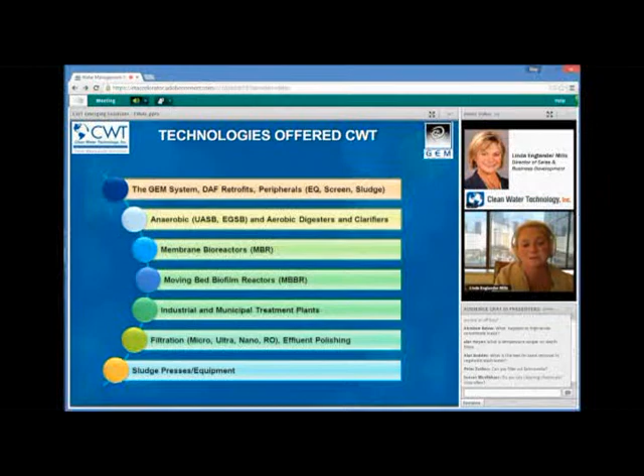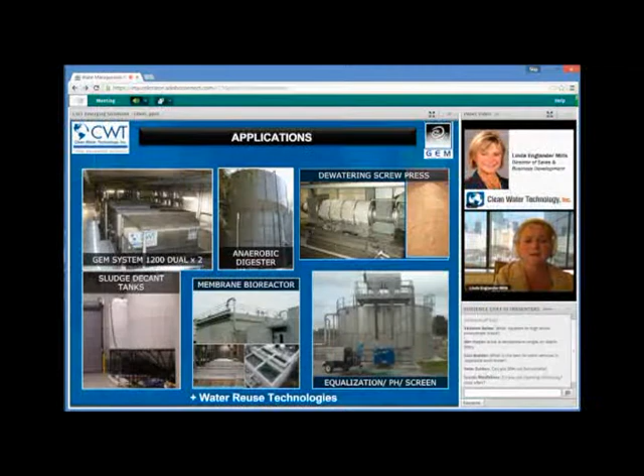Just an example, here's our sludge press, a couple GEM system 1200s that were used in a meat facility. We do meat, poultry, pulp and paper, even car painting and car facilities. So it's a very, very good system.

So at this point, I think I'd like to run to the animation, if you could do that for me.

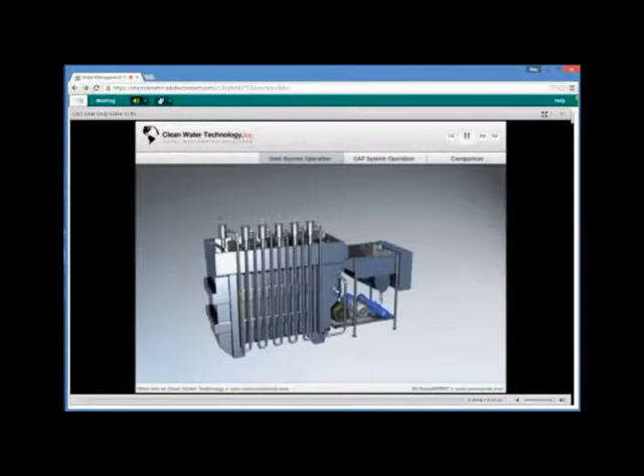Excellent. It should be starting. It hasn't started for me. Oh, there it is. Okay.

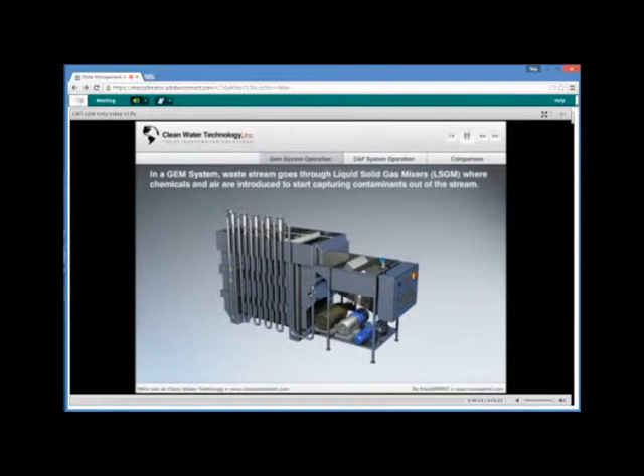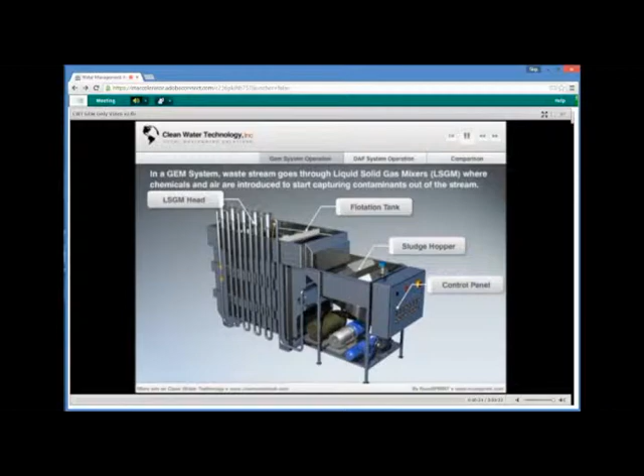So here it is. It's a skid-mounted unit, so everything is available on the skid. You've got the control panel, your flotation tank, your sludge hopper, and your air compressor, water pump, sludge pump. What happens in the system that makes it different than dissolved air flotation is we're injecting air into 100% of the waste stream. So you see this first head.

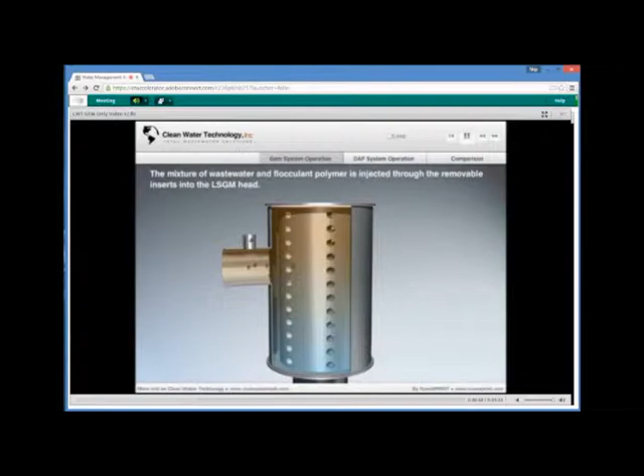We're sending the waste stream through that head, and what we're doing is we're doing it under about 110 psi. We're also adding polymers. Now you can add them in any one of those heads, as you'll see, they run in a series of 6. And so we're going to inject the polymer in any one of the 6 heads.

We use a dual floc approach usually. So that means... well, I'll get to that later. But actually, we're able to expand our system up to twice the size of the minimum usage. So by opening or closing those heads that you saw, the little plugs, we're actually able to increase our flow.

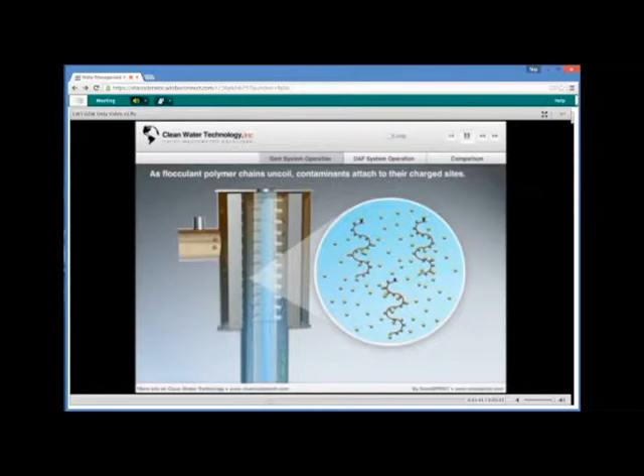So the flocs, as they come into this chamber or the cylinder, the polymers actually are coiled up. Polymers stay coiled up generally, and when they do that, they're only attracting waste particles to the outside. CWT has a patent on uncoiling that polymer. So what we're doing is we're opening up that polymer, availing more than 2 times the charge site, so that we're attracting more waste particles per polymer.

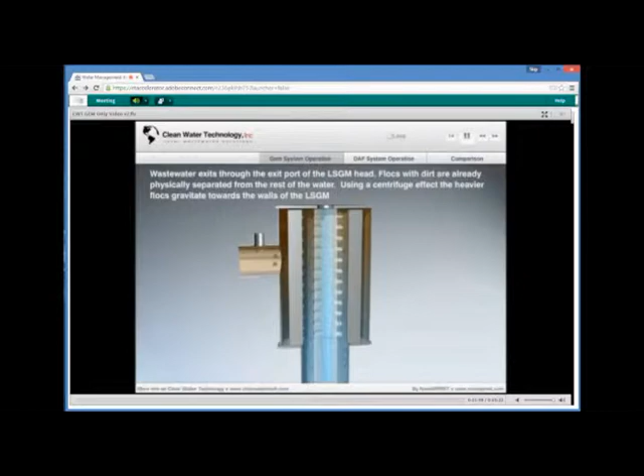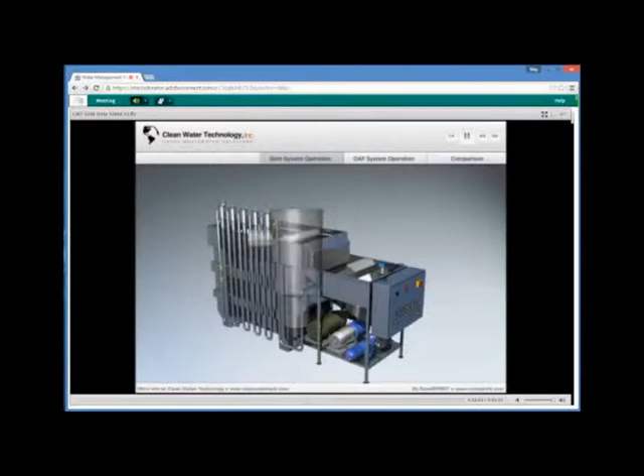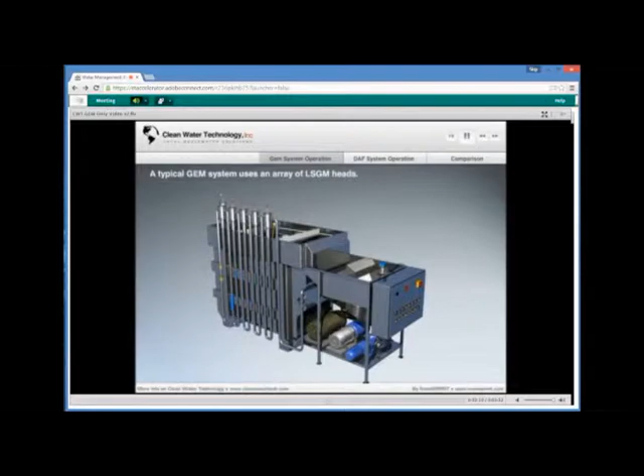And as you can see in these heads, they're in series, and in each head we drop the mixing speed and energy by 10 to 15 psi. So particles that didn't attach earlier on are more able to attach at the slower velocity.

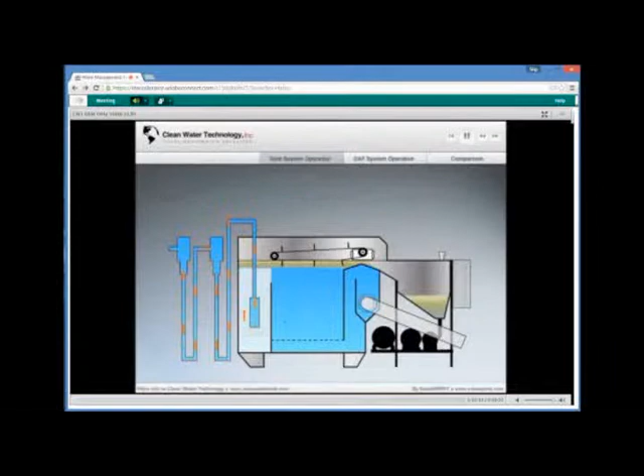Then what we have here on the left of the tank, where it's white, is the bloom chamber. Basically, we're dropping that pressure down to just about nothing. And as we do that, the flocs just pop up almost like popcorn to the top of the tank. As you see, we're lowering the pressure, they're popping up, a lot of the flocs are dewatering.

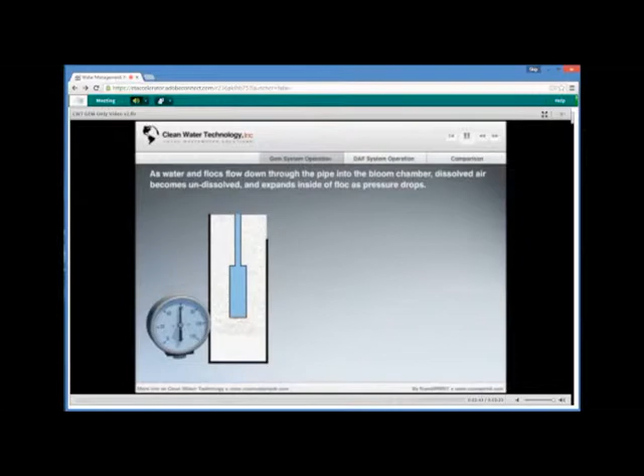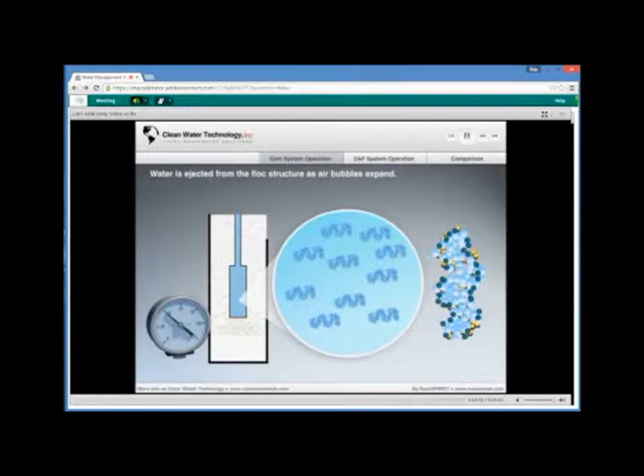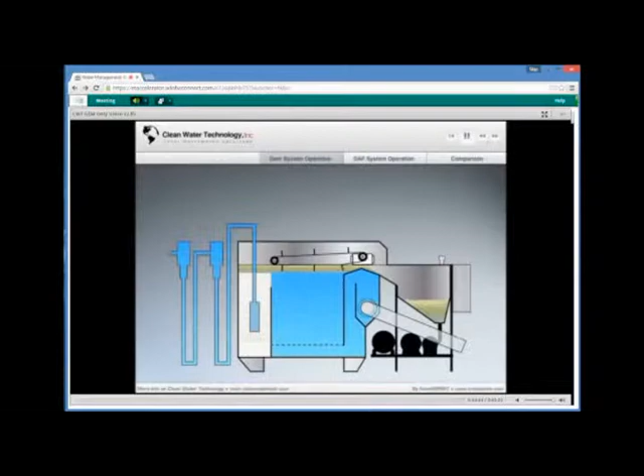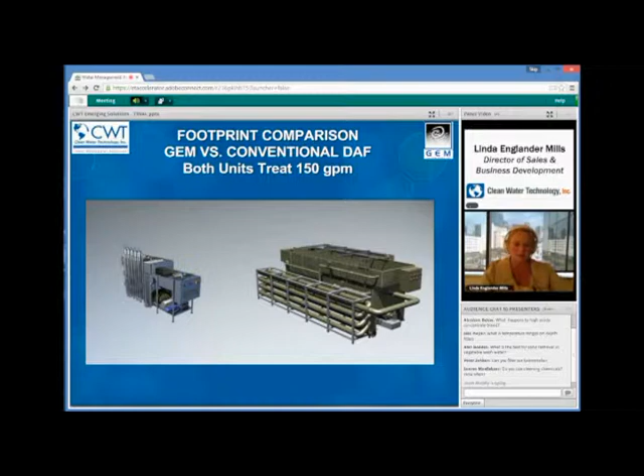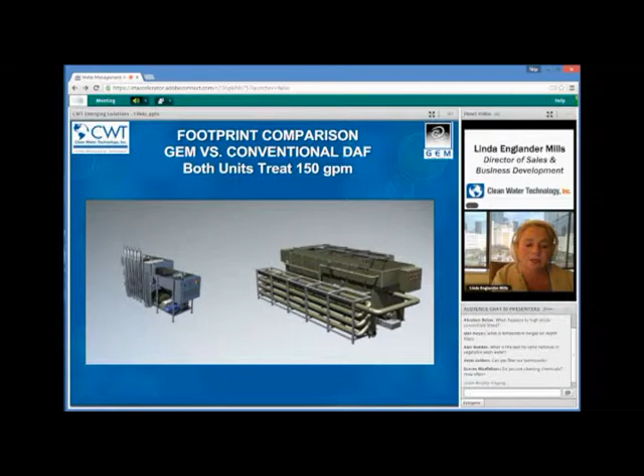So I think we can go back to the slide. So again, it looks crazy that a small system like that could take the place of a larger system, but it's technology that's actually been around in the mining industry for many, many decades. And we just happen to be the first company that brought it here. And we've got several patents that I'm going to talk about a little bit.

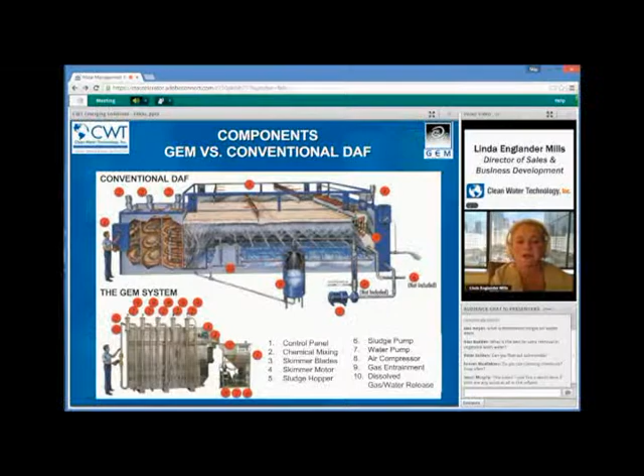But first I'm going to tell you pretty much the difference. As you saw on that skid unit in the animation, everything is on this. It's a plug-and-play system. You've got the control panel, the chem mixing system, skimmer blade and motors, sludge hopper, air compressor, water pump, sludge pump. So everything that you need is in the system.

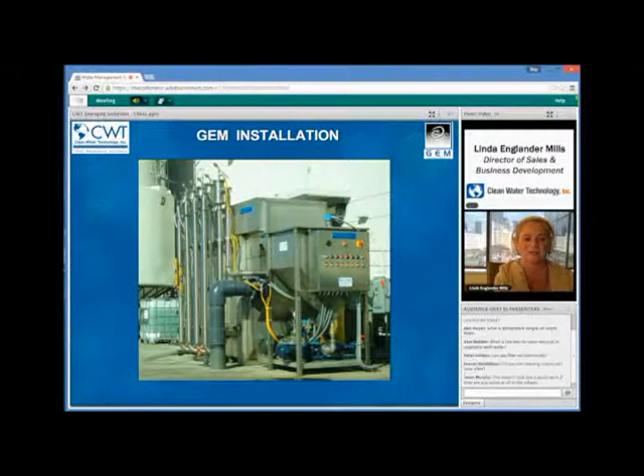Here's, again, an example of plug-and-play. They've got the water pipe going right into our system. We clean the water, it goes right out. It's pretty easy. We've got many, many sizes, anywhere from below 30 GPM, like 5 to 30 GPM, all the way up to 1,800 and beyond. We can do custom size units for you.

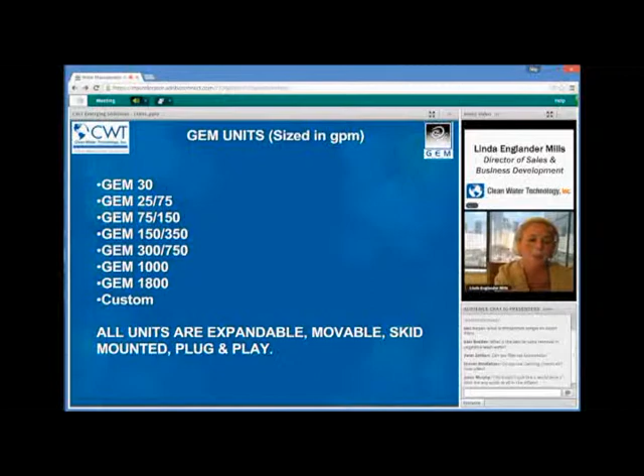Again, they're expandable, they're movable, they're skid mounted, and they're basically plug and play. Plus, we do a lot of the design for you. That's part of the job, and I'll kind of get into that a little bit further. But first, I'm going to talk about our patent.

Again, I mentioned that we're dissolving air into 100% of the waste stream. The reason why that's important is because as we do that, we're creating many, many more bubbles than would a dissolved air flotation unit, which generally recycles the stream and adds air kind of in the tank to help float. We're injecting that air at the very beginning. So we're creating about 10 million bubbles versus maybe about 2 million bubbles.

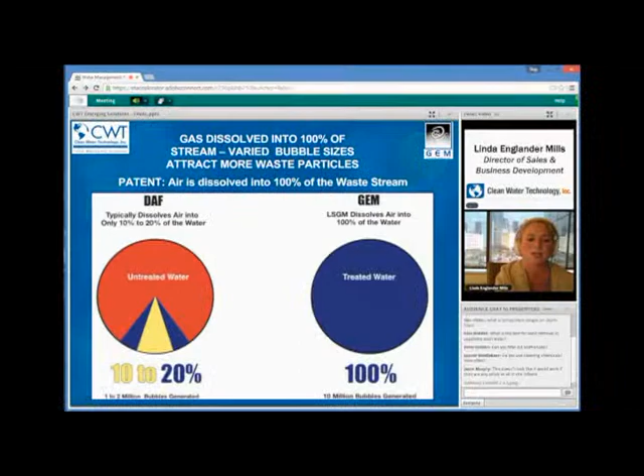So again, waste particles like to attract to bubbles that are the same size or smaller. So by creating very small bubbles and by having more bubbles, we've got a much better chance to attract way more waste particles or more contaminants.

The second patent, again, is on the chemical efficiency and mixing. We've got very stringent control over the chemistry dosing, the mixing time, and the mixing speed. In each of those heads, we can make that happen.

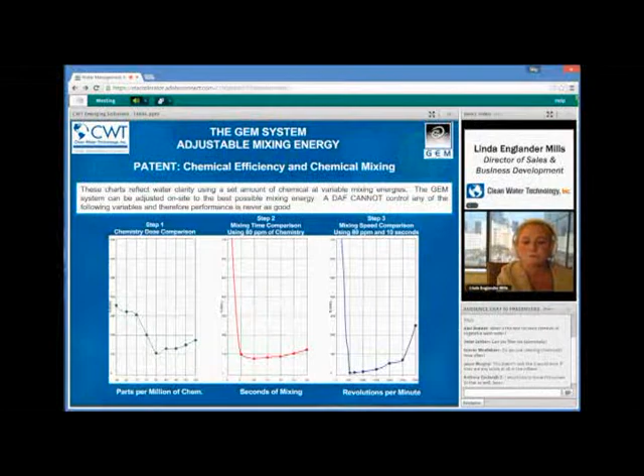The next point is our bubbles expand because we're using a floc dewatering technique. In a dissolved air flotation unit, the polymers and waste particles generally rely on the collision method, bumping into each other and then using the air to float. What we're doing is proactively separating that in our LSGM heads or GEM technology, so by the time our solids hit the tank, they're already separated.

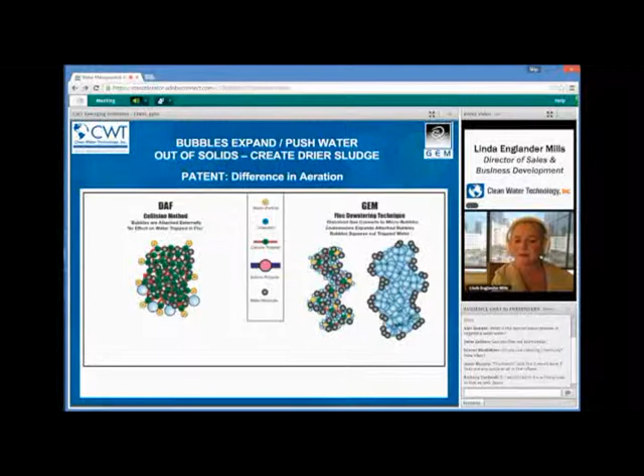Again, some of the operational things, as Cliff had mentioned earlier, operational costs are just as important as capital costs.

Basically, we're creating much drier sludge. The polymers close back up and squeeze out the air or water, but also our sludge, because of all that air we're introducing, continues to decant over a number of days. So if you put it in a cone bottom tank, it's going to decant up to 10 to 13% off the bat, depending on your waste stream. Obviously every stream is different, but it can decant up to 20, I've even seen 30% or more.

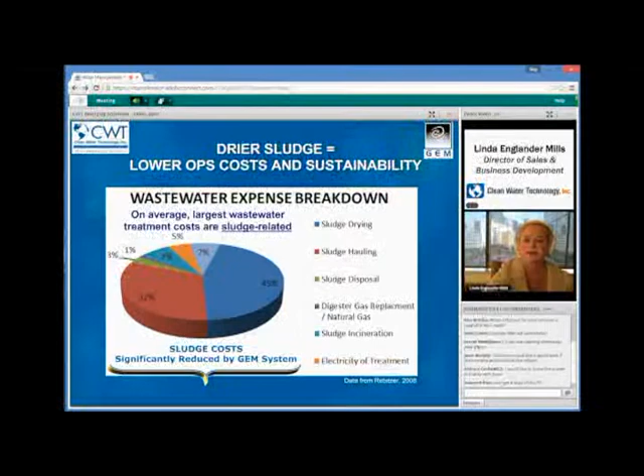So it's pretty phenomenal. And if you look at sludge costs, almost 77% - this was a study done in 2008 - about 77% of people's wastewater costs were related to sludge hauling, sludge disposal, sludge drying. So that's why it's so important that we have such drier sludge.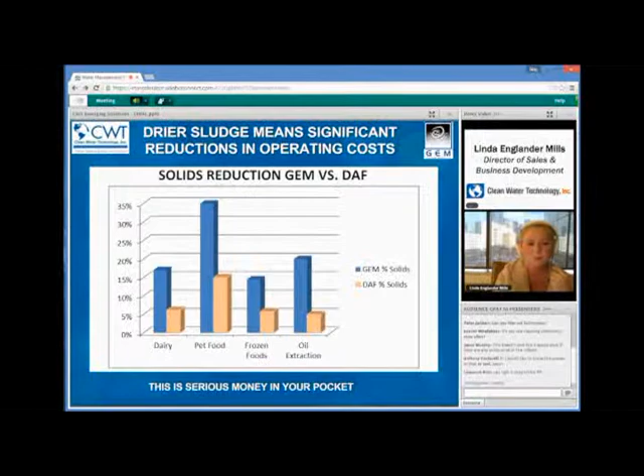You can see here, GEM versus DAF in very different industries - dairy, pet food, frozen foods, and even oil. Our sludge is more than 2 times drier. So that's serious money. It's less trucks on the road, it's more sustainable, it's important. Here's just a different setting showing all the different types of sludge we see in different waste streams.

So then we get to chemistry. I'm sorry, but I have to have a sip of water. Do I have water time?

Okay, so basically we're looking at reduction rates here, again different industries, same as before. TSS - we're getting significantly better TSS removal and COD removal in the various industries. But the important thing to look at too is we're using a lot less chemistry, so that again is serious money in your pocket.

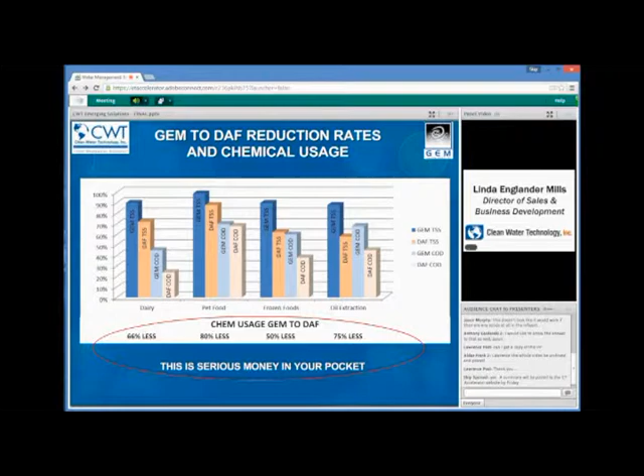The chemistry we use is available through any supplier. So if you've got your favorite local supplier, we do like to get wastewater samples and talk to the chemical supplier about what should be supplied, what's best, because running a jar test at a job site is not the same thing as what we do at our plant.

What we do is ask our clients to send us a sample of their wastewater. We have a PhD chemist who specializes in flotation, flocculation, and chemistry. We will run TSS, turbidity, COD, and we can run BOD and FOG as well. This is important because, again, it's not like running a jar in the field - we are actually mimicking what's going to happen with the GEM system in our laboratory.

So when people say, well, we've already got data from our city or whatever, that's great - it's great to have so we can look at trends, but it's also very good for us to get a wastewater sample. We provide free of charge a report that shows the client removal rates they can expect and expected amount of dosing. It really helps us help them figure out their operational costs.

I think everybody speaking today will agree that a primary treatment system cannot reduce your dissolved BOD - it's just part of life. You need a biological system for that. But if we can get out 98%, or 99%, I've seen 99.9% of your total suspended solids, we're able to get out virtually all of the non-dissolved BOD. So all you're left with is the BOD, which can ultimately reduce your secondary treatment, your biological treatment size.

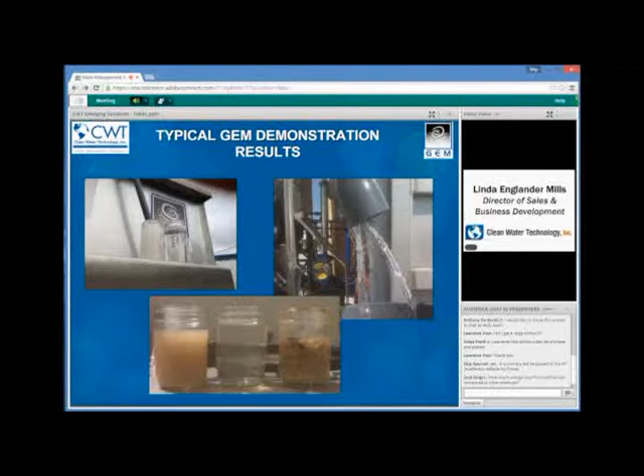Again, people have been amazed that the water looks drinkable. Of course, I don't think you want to drink it, but we make very, very clean water.

We also retrofit existing DAF. For instance, if you have a DAF that's not that old and the tank is in good shape, we can basically just take our GEM technology and add it to the existing DAF. Because everything's done in those heads that I showed you, which you can see in this picture, we can get 2, 3, 4 times the hydraulic capacity and contaminant loading out of a DAF that's been maxed out due to hydraulic loading.

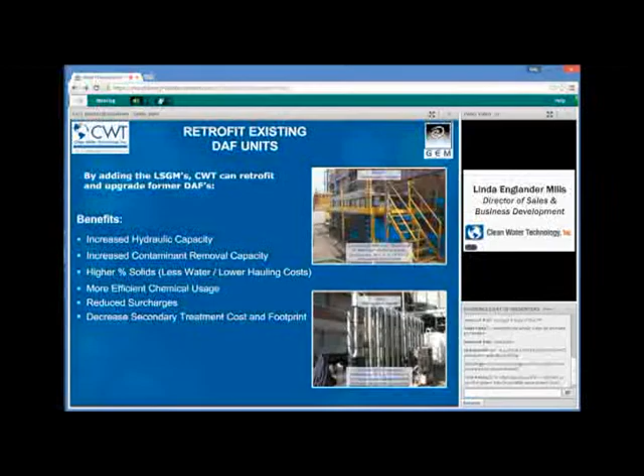One thing that's important to note is that the GEM system is sized only based on hydraulic loading. It can handle anywhere from 200 to 12,000 ppm of fats, oils, and grease, or TSS—it's the same size system. So while you're conserving water, your clients are conserving water, they're going to have an increase in contaminant loading in their water. You don't need to get a bigger system. The same size unit's going to help you. So it's very important to note.